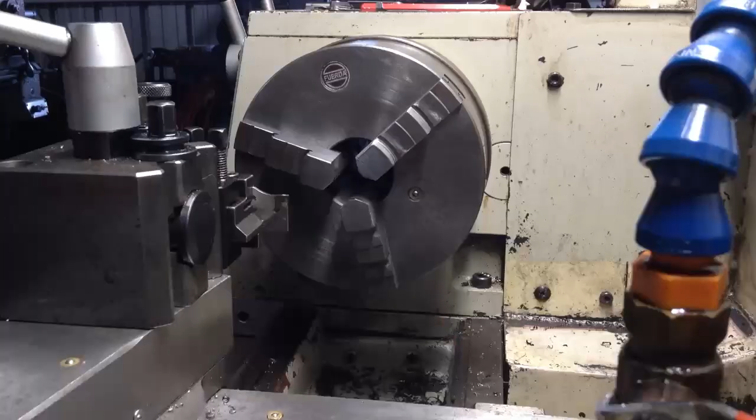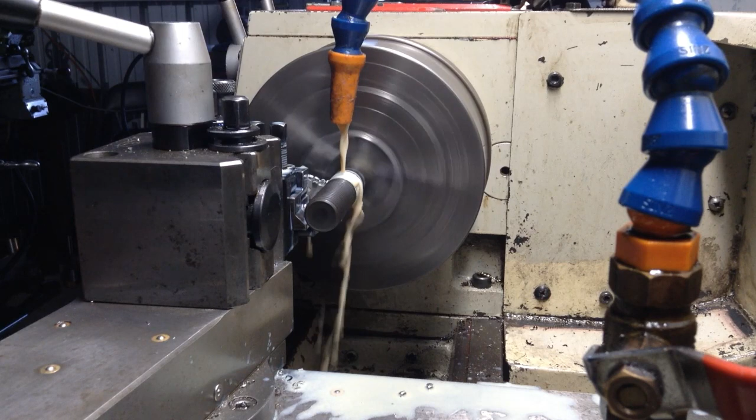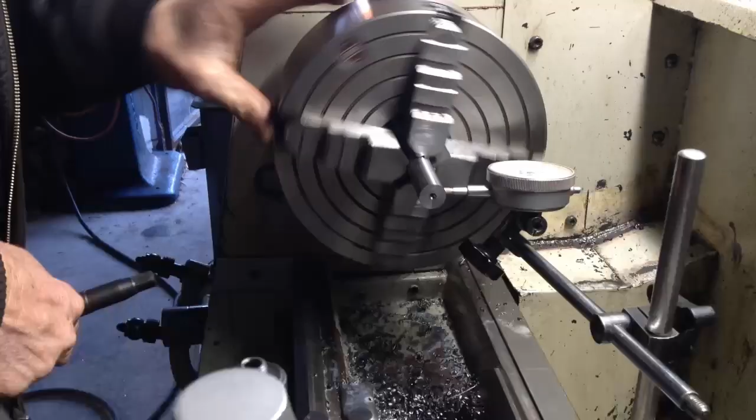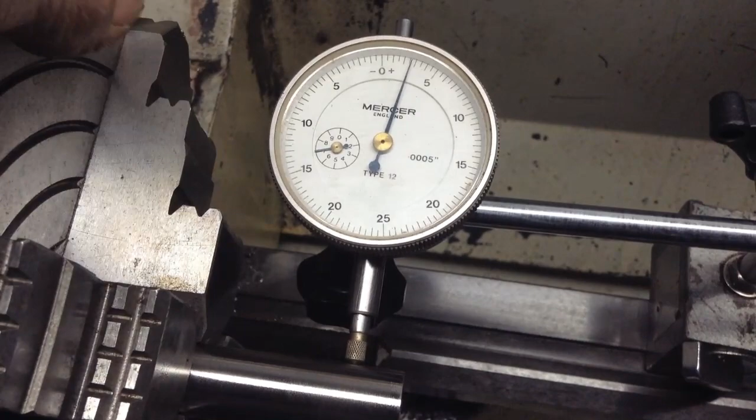So we're just going to lop the head of the bolt off and the thread of the bolt off with a parting tool, and we'll turn the shank down to just above 17 millimeters, same as what we did on the previous stock, and then that'll give us our material to work with. That should be close enough for what we want.

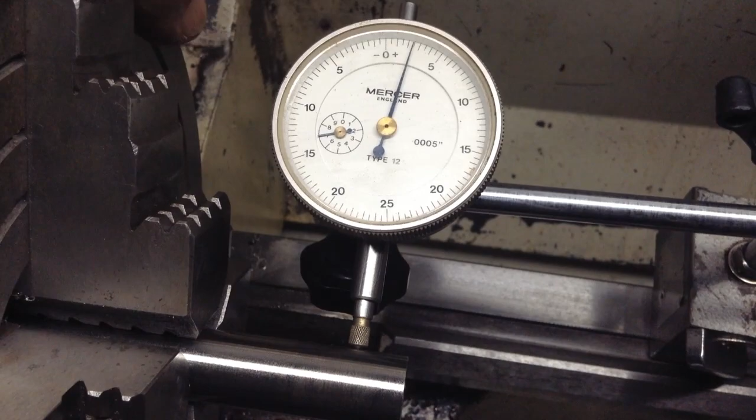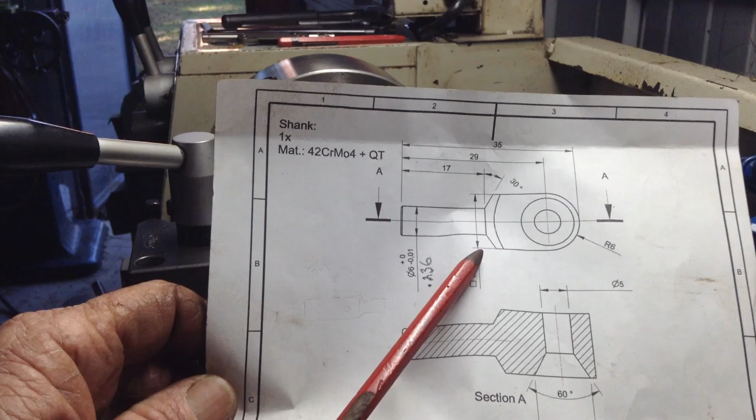Okay, this is the part we're up to next. This is the part that the indicator holder attaches through the stem here to your drill chuck or collet or whatever you've got up the spout of your mill to grab hold of the thing. So I'm actually going to make two. This one is a 6mm one, and I'll make a 1/4 inch one as well.

So there's nothing too technical here. All this part here is just a duplication really of the dovetail section. So we'll just rip these two parts down parallel, and I'll just mill the radius and countersink it.

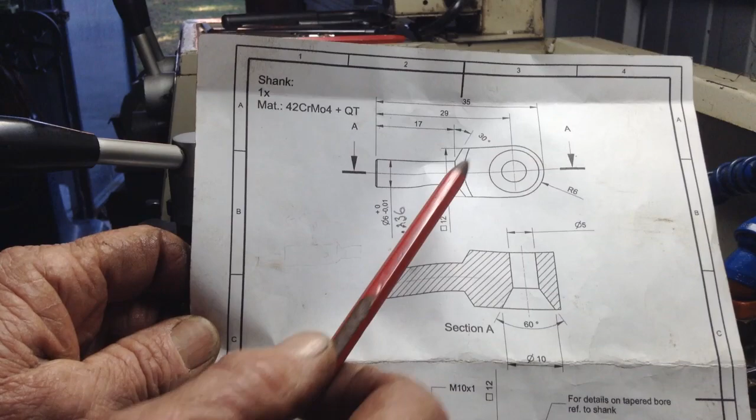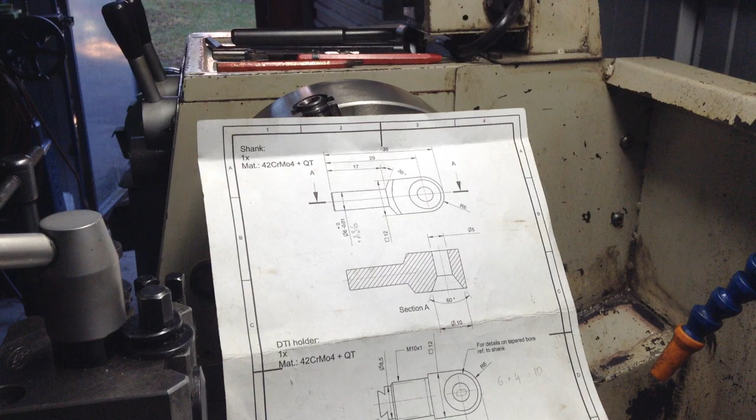So this stem is machined down, and there's a 30-degree angle on the end there. So I'm just going to use a bit of high-speed steel, and all I've done is just ground it back to 30 degrees. Close enough, and that'll be fine. We'll just turn along, boom boom boom, there's our angle.

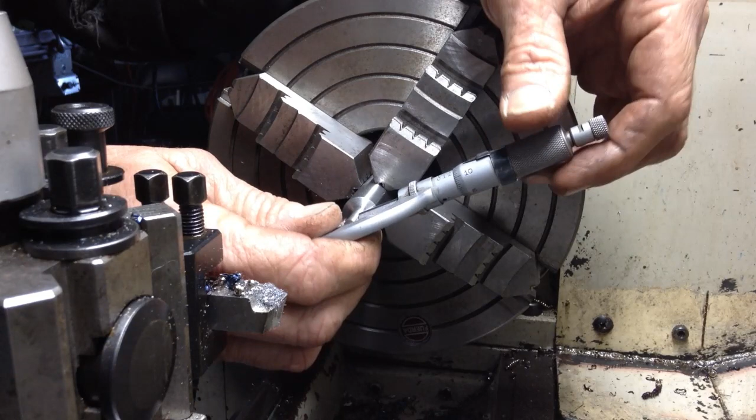Okay, we'll get a size and see how we're travelling. Okay, for our 1/4 inch one, we've got 15 thou to go. We're 1/2 thou up, that's close enough. We'll polish that out. I'll just give this a brighten up with a bit of emery, and then that's done.

Check our size. We're there, 1/4 inch, cool. So what we'll do now, we'll flip her over. And we'll repeat the process on the other end, and we'll make this one 6mm.

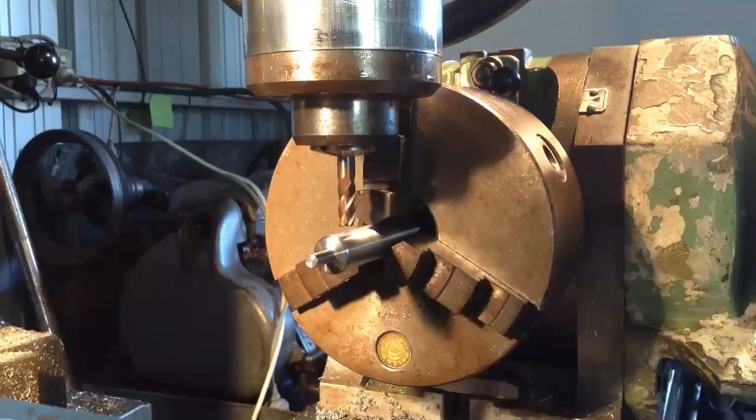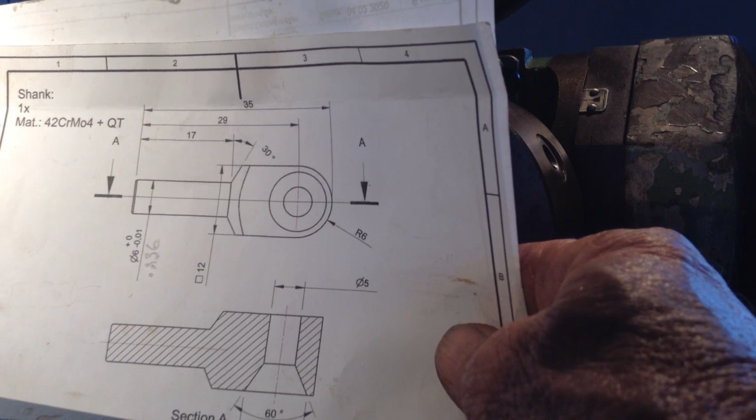Now we've got our part set up in the indexing head again, and it's pretty well the same procedure as we did in the previous video, machining the round part square, and then we'll come over to the rotary table and put the end feature in the same as the previous video. So we'll just put in a short snippet of this, and we'll be climb milling around the outside just to keep the burrs away.

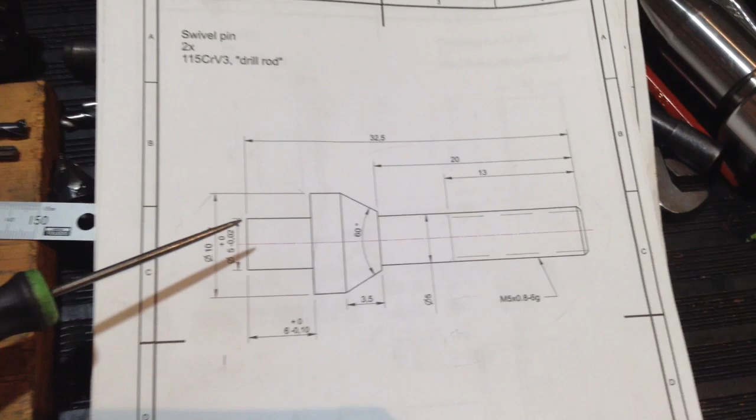Okay, we had a win with our shanks. We actually made 2 because on the drawing there's the 6mm shank, so I made one with 6mm and one with 1/4, just in case. So now we're going to make 2 swivel pins. So a bit of a thread to do, a bit of an angle to do, and we'll just use our offcuts from the last 2 pieces.

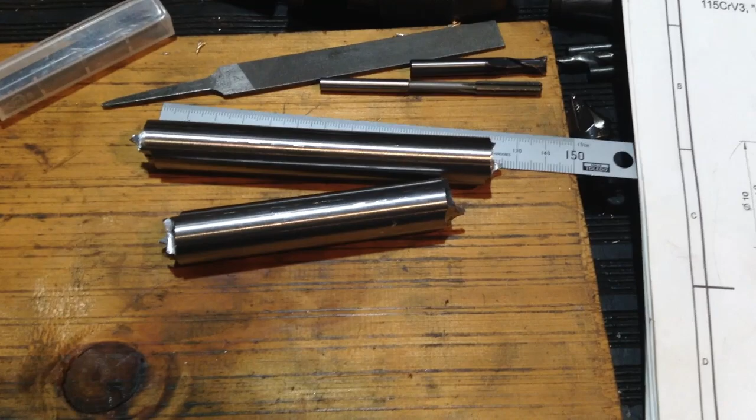So as you would have seen, we'll be making a piece on either end of our bar stock. Just makes it easier to hold on to, and then we can chop it off at the last minute. So we'll do the same thing with these. We'll rough them out, and we'll come in with a parting tool, rough that out, chop them off, and we'll turn them round. We may stick them in a collet just to finish machine that little part there. So over to the lathe.

Alright, we'll stick our drawing on the wall there so we can see what's going on. Get her in gear. Stringy crap.

So we're going for 5mm on this one and 10mm on this one. Okay, so we got 6.37, so 1.37 to come off that one.

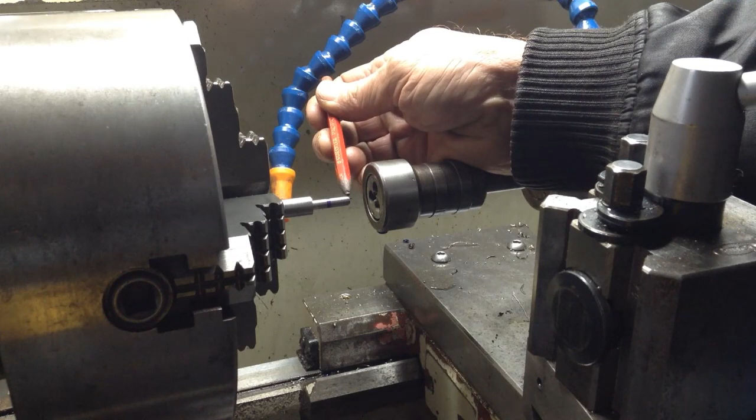So we've put a decent chamfer for a lead in for the die on our 5mm part there. We've marked off the length it has to be threaded to. We've just got our 5mm die in our tailstock die holder, which by the way needs a lot of work. I need to make a new one of these I think. I might make one with a little handle on it, make it a bit easier. So anyway, let's have a crack.

Okay. Make sure our nut fits. That's it, lovely.

Okay, we have to take the shoulder out now and put a 30-degree chamfer on there. So I've just got a piece of tool steel here, a bit of Rex 95. So being a new blank, it's already got a relief on the front. So I'll just tidy that up a bit, maybe just give it a little bit of top rake, set our tool on the angle, and I think we'll just plunge straight in with it and see how it goes.

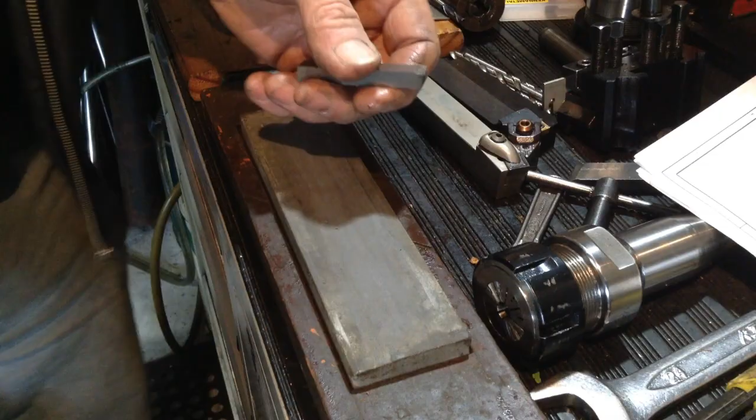Should be okay, that. So we're just using our bevel square to get the tool angle as close as we can get it. Just eyeballing it for level and bumping the tool around until we're looking pretty good here. So that'll be fine for our initial trial cut. Then once we take a cut, we'll try the part on the chamfer and see how it fits.

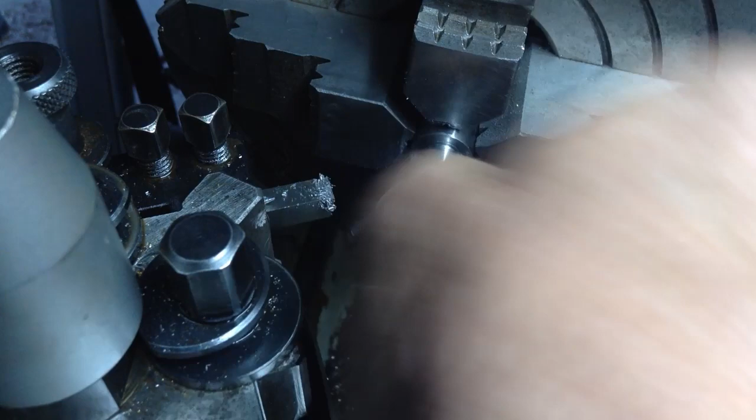Well, might need a bit more blue on it. I re-blued that. I think I'll use a bit of bearing blue on that, eh? Let's see if we can get a better reading, because it looks pretty close. So let's try a bit of bearing blue on here. See if we can dab a bit on. I'm not in any real big hurry to get the stuff on my fingers this morning. There's a bit on there. That'll give us a bit of an idea of what's happening.

Well, I must say that looks pretty good. Let's do it again in case I've got a bit much blue on there. Okay, so we've wiped the blue out of our part and we'll just try it again. Sometimes too much blue will give you a bit of a false reading. No, that's okay. You've got to be happy with that.

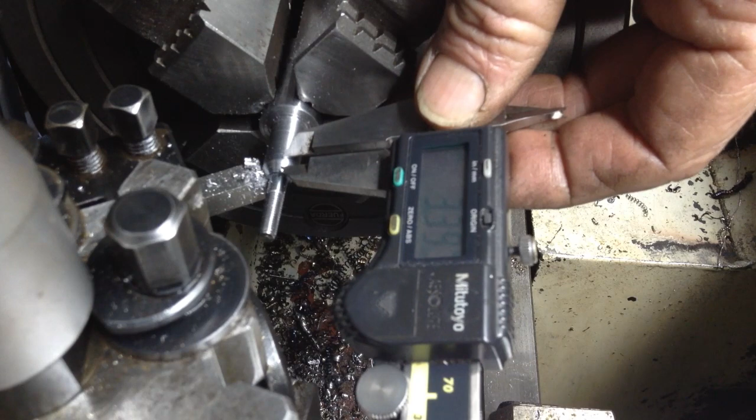It looks about where we need to be, maybe just a fraction more. I think we're looking pretty good there. Yeah. No, I think we'll leave that one at that.

Okay. So while we have our tool on the angle like this, it's easier with the 4-jaw just to slip this part out and slip our next one in and cut the same angle than to do a tool change. As my compound slide is still set for the R8 tapers, remember we've got all these arbors to grind, and that's going to be the next job, to finish those, and I don't want to upset the angle of the compound because I know it's spot on the right angle.

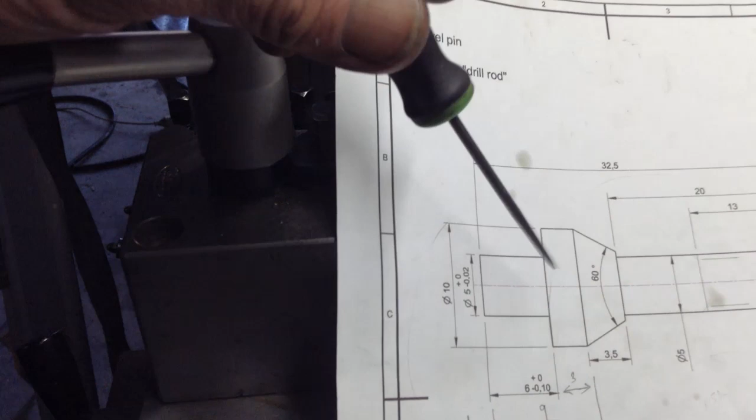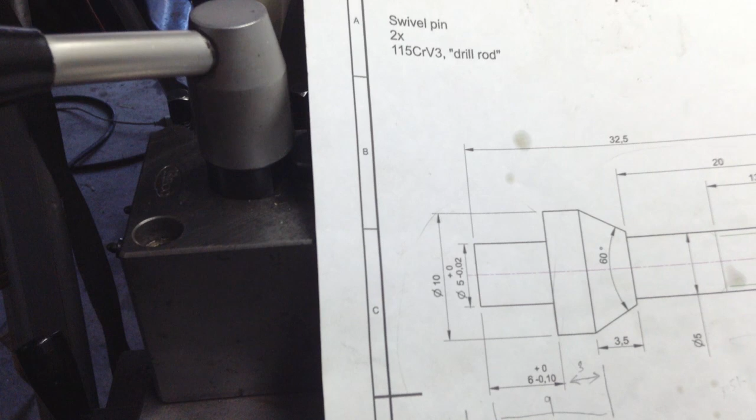So what we plan to do now is this diameter here. So we're going to come in with the parting tool. We'll just chop most of this out with the parting tool, and then I've got another smaller tool I've ground up just to finish cut. So we'll cut along the face, that'll bring it to length here, and then we'll carry on cutting across the diameter here just to bring it to size. So we'll rough it out with the parting tool first and get our other smaller tool in there.

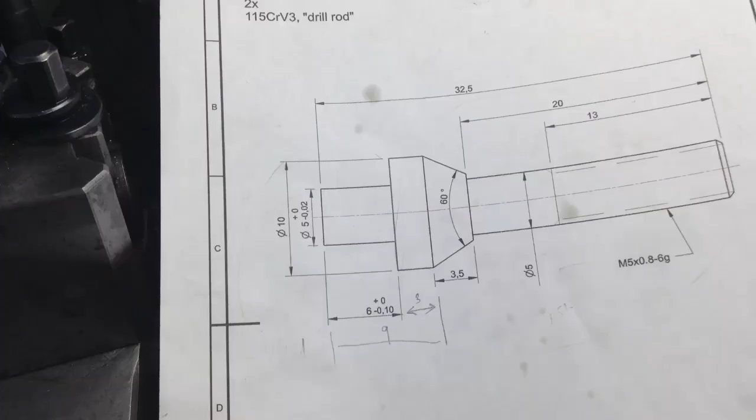Okay, this is just a small tool I've ground up, so that will let us come in, do this face, and then we can turn either direction along here to get this diameter to size. So we'll get this set up in the lathe and start turning.

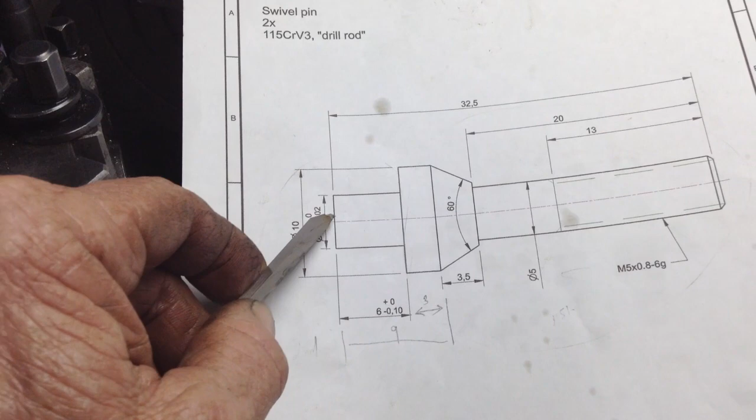The other option is I could chop this off now and grip here in a collet. Means I'd have to take the chuck off, put the collet chuck on, but that's no dramas. That's just an alternate way to do the same job, so we're going to do it this way.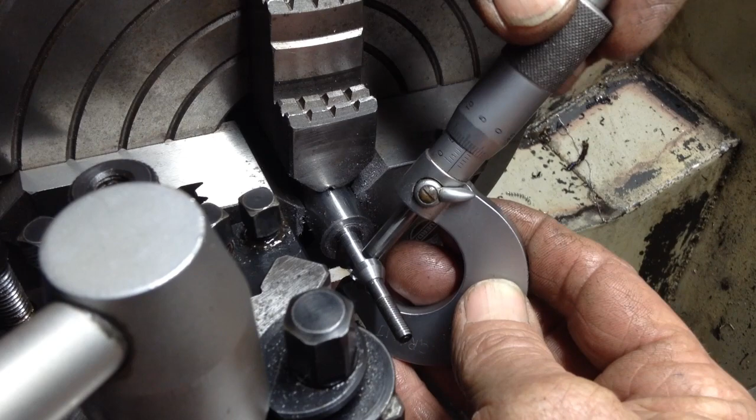Just slow that down a bit. We'll just check our shoulder width. So that's right, 3mm. Now our diameter. So we've got 0.5mm to go. So I'll probably take that in 2 passes.

So this should give us about 0.2 to go. 0.24. 0.23, 0.24. And we're there. 100th under, that's fine. So we'll just run a file over this and knock the burrs off it.

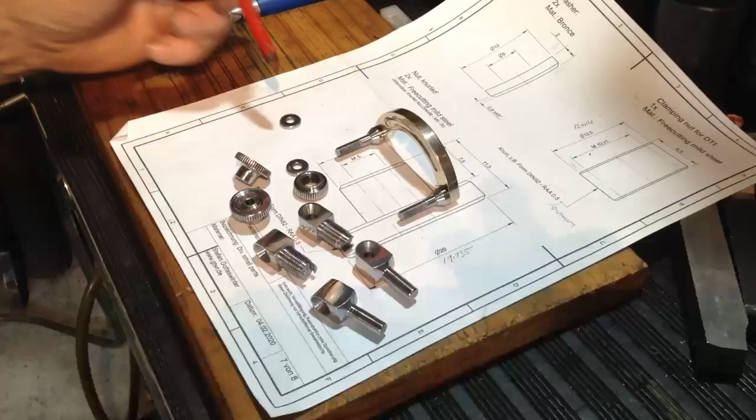Missed that one. Okay, well there's our finished part, complete with tit on the end we now have to file off, so good thing. So we have here all of our completed individual parts. The arm with the pins fitted, the nut to hold the indicator, the washers, the 2 knobs to tighten up on here, and all our holders.

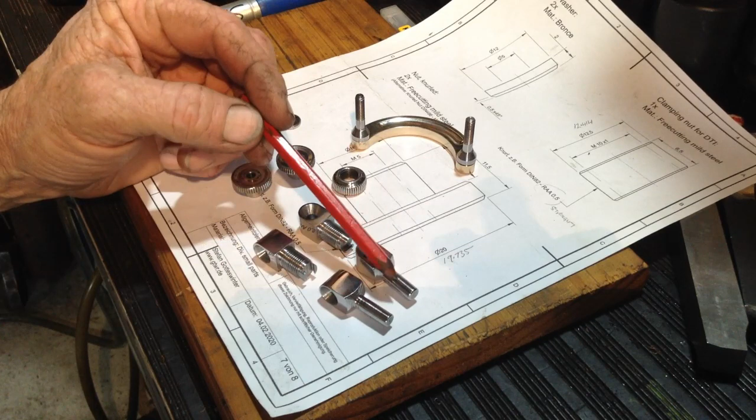So the reason why I've got extra holders, I think I explained earlier, we have a 6mm one, like the drawing said, and also a 1/4 inch one, because I've got a few things that take 1/4 inch stems. And our 2 indicator clamps, indicator holders.

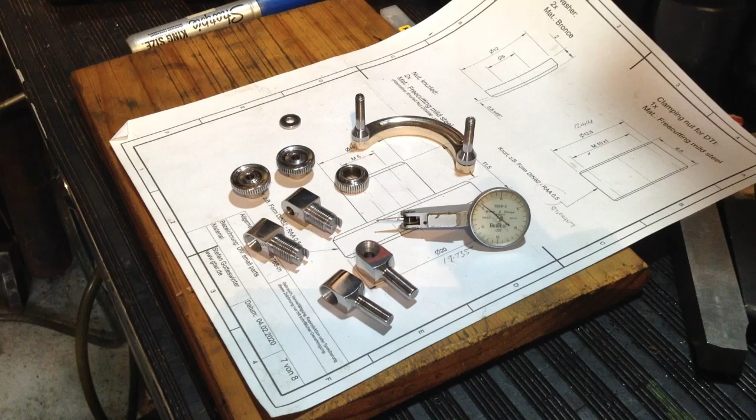The reason why we got 2, as we found out earlier, this Brown and Sharpe BesTest has a slightly different sized dovetail than this Federal. So yeah, on the back it's not much in it, but there's a very slight difference in dovetails, just enough so one won't fit the other one's attachments. So that's a bit unfortunate, hence the reason why we've got 2 dovetails.

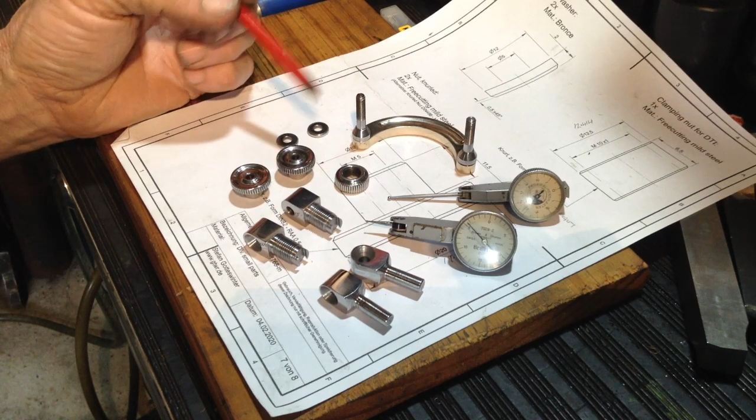So we'll get a picture of it all assembled up, and it's been a bit of an interesting build, quite fiddly, and I'm not used to really working with such small fiddly bits and pieces. But we got there in the end. It was all a success, so yeah, I'll give you a shot of it all together.

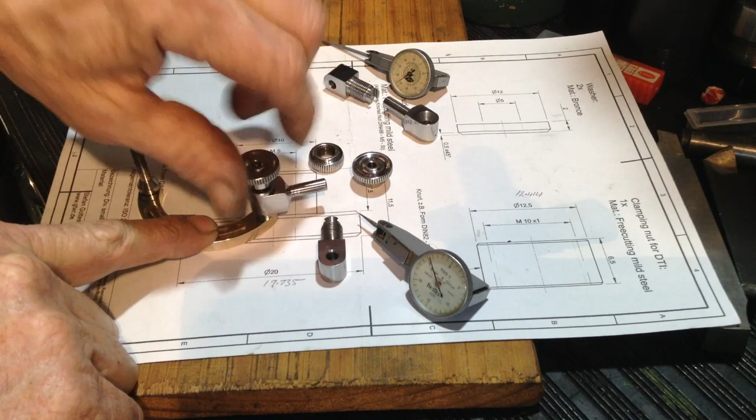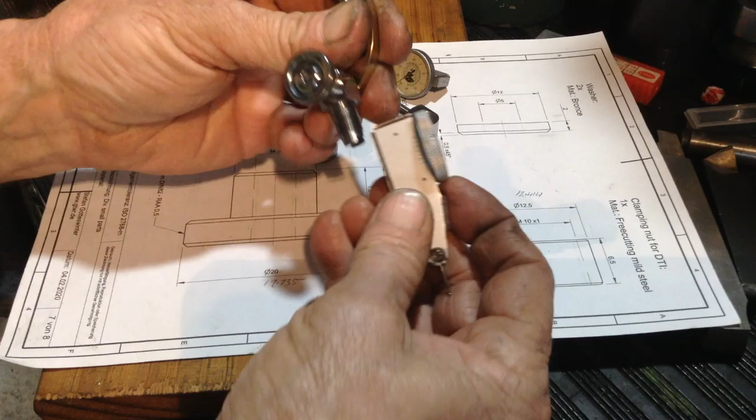So we have one of the stems goes on there. That's the end that goes into the chuck and the spindle, washer. Nut. Then the other end, which is the holder, washer, other nut. Now the indicator. Oh, we better put the indicator lock nut on.

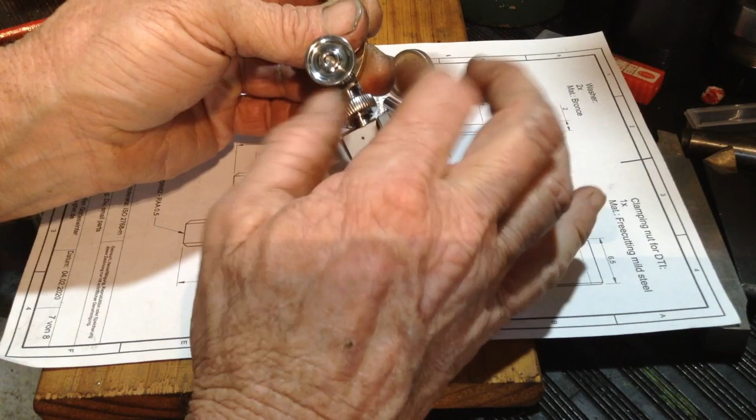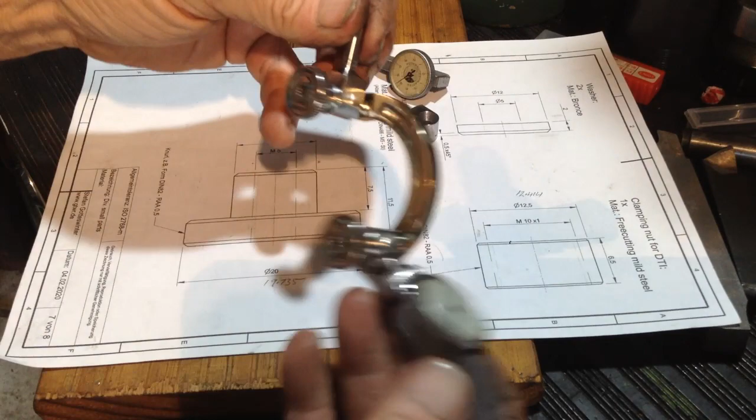It goes on there. So then our indicator goes onto there. Centralise that. So that just gets nipped up. So this can be held in the stem of the machine for indicating your quill central to your job, or there you have it, complete.

Well, yes, we're at the end of quite a monumental effort to get all that done, quite a fiddly job, but no, there's some really good little setups and procedures to go through to make the tool.

So big thanks to Emma from Emma's Spare Room Machine Shop for suggesting the idea of getting a few people to make one of these, and to Stefan Gotteswinter for making the plans available too for making the tool.

So anyway, take care, take it easy, and I think we're going to swing back onto our arbors, because we've got a lot of grinding to do on our arbors in the next episode.